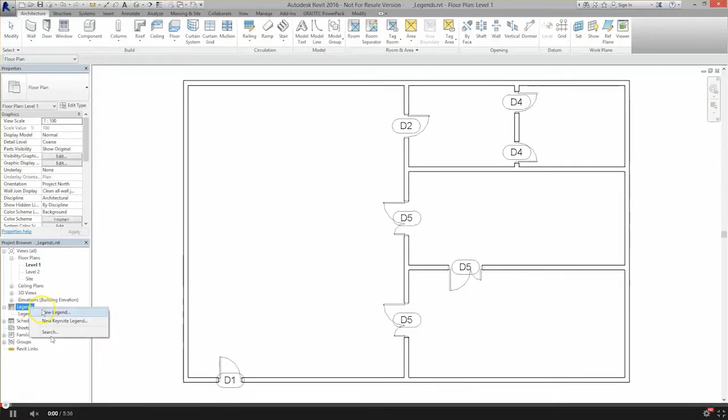So essentially what we're doing here is creating a new legend view. In that legend view, we're going to use a legend component, which is the legend door. We're going to change that to an elevation view and drop that on the screen, then change the shaded setting so we can see what it looks like.

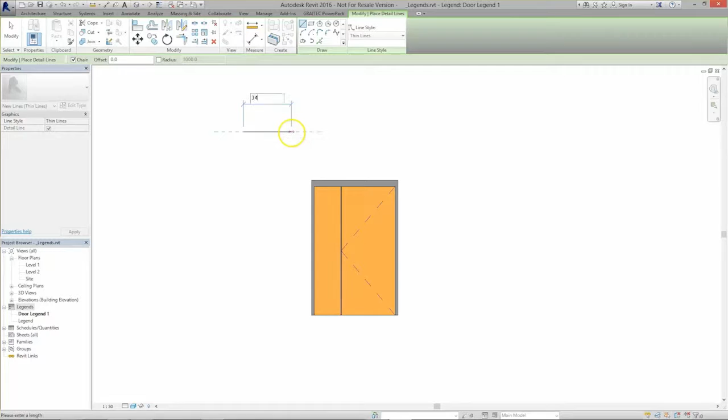What we're now going to do is just draw some detail lines around this, which will effectively be our table, or our legend itself. So this is essentially where our parameters are going to sit, and we're just producing the heading boxes here.

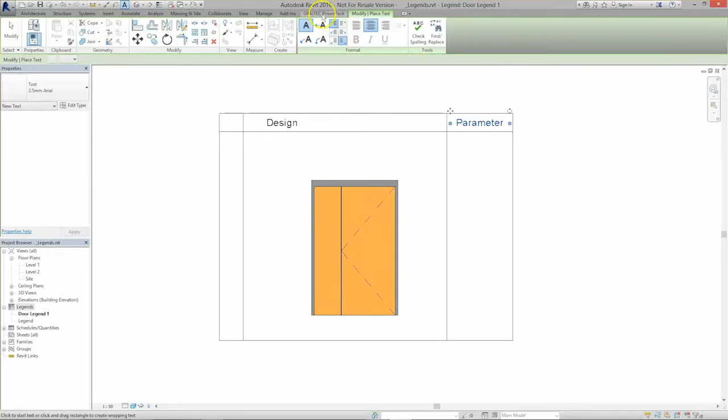We're going to go to our text, and we're just going to add some basic text in here, just to assign some parameter data. Now we're going to go over to our legend tool within the GRAITEC PowerPack and load some parameters.

So we can use a project parameter, and we're going to align that to the right. And again, we're going to put another one in here, which is actually the door elevation one.

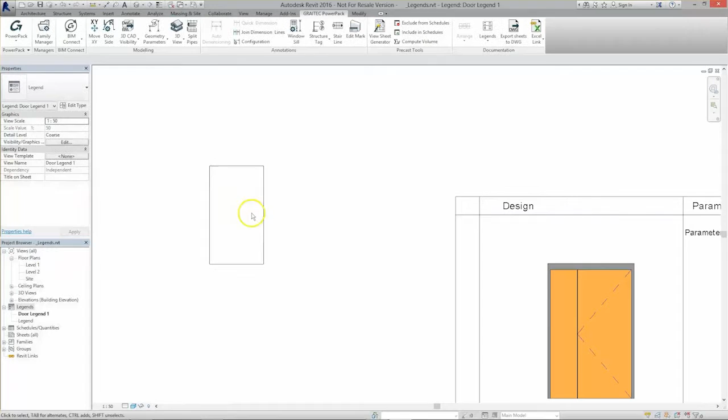So we're going to pick this one, check the dimensions, which are 1350 by 2100, change the width of this door to suit the dimensions, take off the sill height, and then we're going to add some dimensions to this, and this will give us the parameter data that we require.

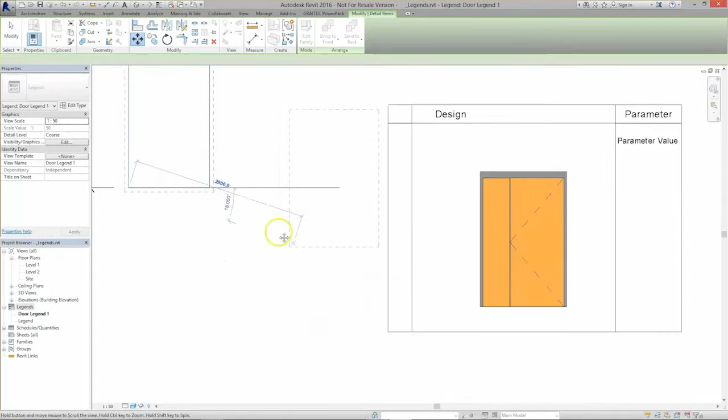Once we've added this information, we're just simply going to move the door so it sits on top of the existing door, and this will link the two together for us.

Once we've done that, we can then go to create and modify our legend units. We just highlight everything. This will bring us into a property box asking us what category we're looking at. So we're going to use doors, and then what geometry or what parameters do we want.

So we're going to use things like description and comments. We're then going to go and put in the type, the count level per floor, and the count total, so we can see all this information added in.

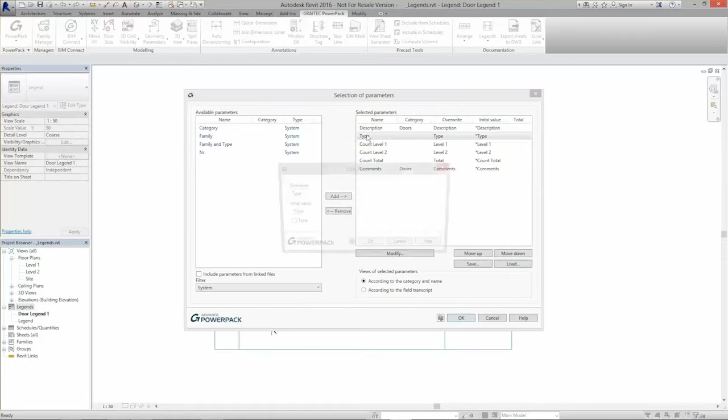We're going to move down and we can move up different components, as you can see, and we can override them if we need to. So if we want to change type to description, then we can do. We can press OK on that.

We can also change whether it's the category by name or field transcript, as you can see. And we can go to the count total and actually request a total number, so we're going to put an initial value of 0 in there.

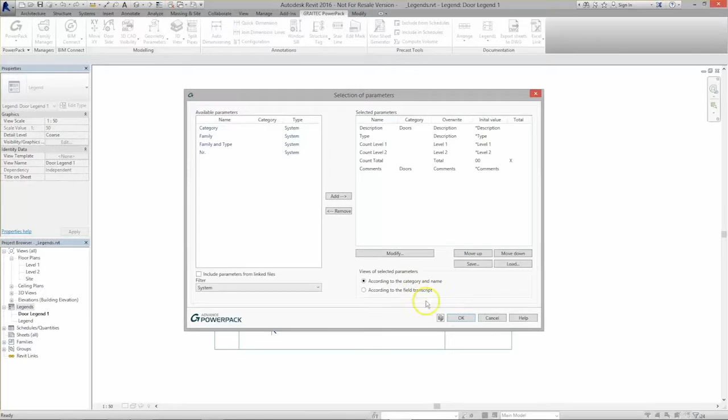Once we've done that, we can press OK, and it will ask us then how we want to repeat these titles along the screen. As you can see, we can repeat them to the right. We can just set out a length, and that will repeat that column for us with those relevant parameters in them. So again, not complicated.

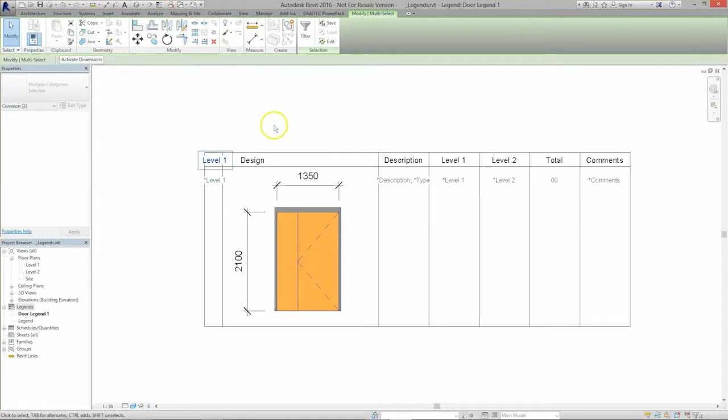And we're just going to move the level one over to the left-hand side of the image. Once we've done that, we can then modify the legend unit parameters, so we're going to highlight everything, and you'll see that we can come in and just make some changes here.

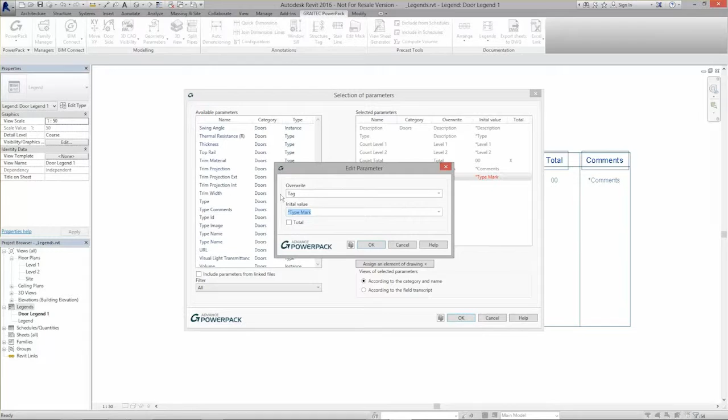So the first thing we want to do is change the type mark. It's gone red because we've already got that name. So we're just going to change that to tag and put an initial value of DXX. Okay, so we can see that in there.

So we're linking that in, and it's gone grey. Once we've done that, we're now going to start to populate the legend.

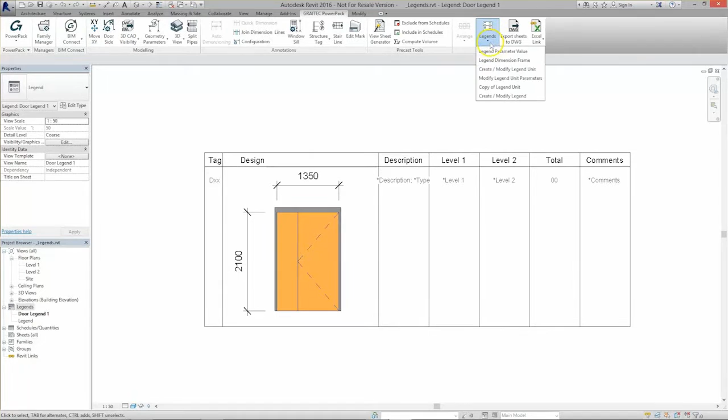So we're going to create and modify a legend. We're going to highlight everything that needs populating. In here, we've got some setting up for the sorting of them, so we're going to sort them by tag and tell them the page size that we want.

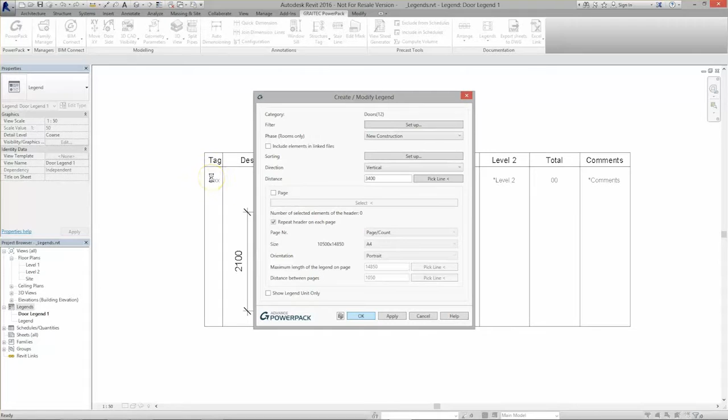We're going to say no to that. We just want them to array towards the bottom. And what you'll find is we've now created a legend of all the doors held within the project using all that description information that we've added.

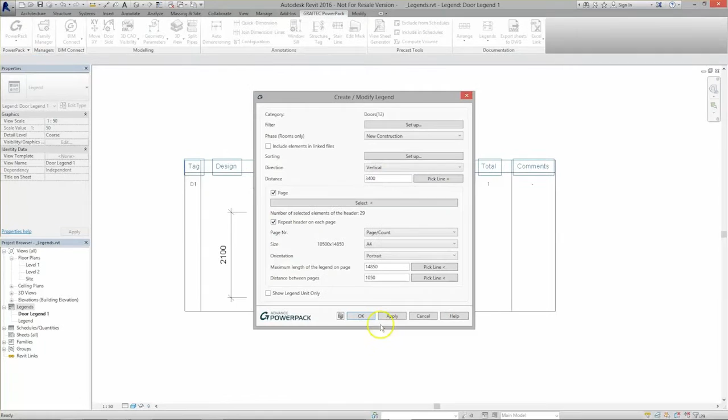We can do it by page if we need to, so again just make some selections, press finish, press OK, and we can do it by A4 size, fitting these to sheets rather than just having them free for all across the screen.